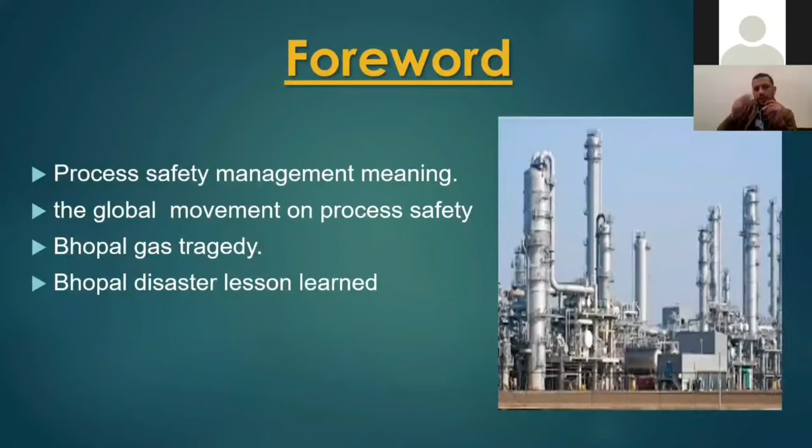But what are the lessons learned from this lecture? Firstly, to easily understand the meaning of process safety and differentiate between process safety and occupational safety. Also, you will learn about the most important accidents, how to analyze them, and the importance of learning for government, companies, and individuals from the incident lessons learned.

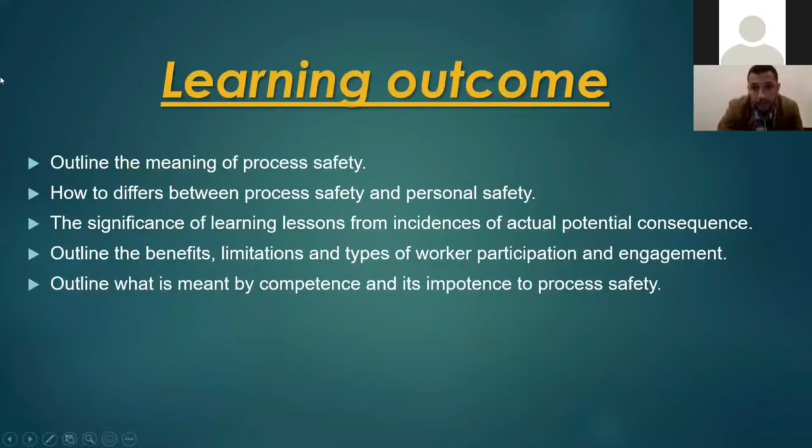Now we need to know the meaning of process safety. First, we will distinguish between process safety and personal safety. Let's start with personal safety, which has the same meaning as occupational safety.

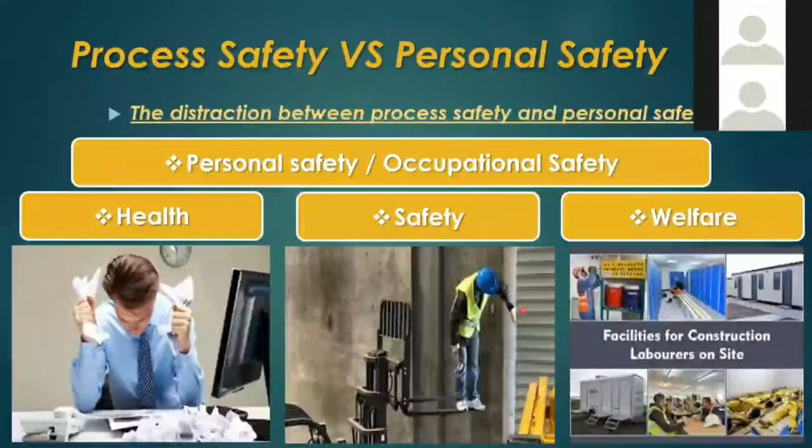The risk means the combination between the probability of a hazard and the severity of that hazard. You see here the probability and the severity. So from this figure, you can get that the risk score equals probability multiplied by severity. This is one of the methods of risk assessment, called quantitative risk assessment.

For understanding the meaning of risk, I will take the example of the working at height hazard. If you're working at height, the potential probability of falling will increase if there is no precaution set to prevent or reduce its probability, and the consequence will increase if the height increases.

Finally, again, the risk equals probability multiplied by severity.

Again, back to the meaning of important rules in industry - of course, there are some codes taking a legal phase and providing good practice for implementing occupational safety.

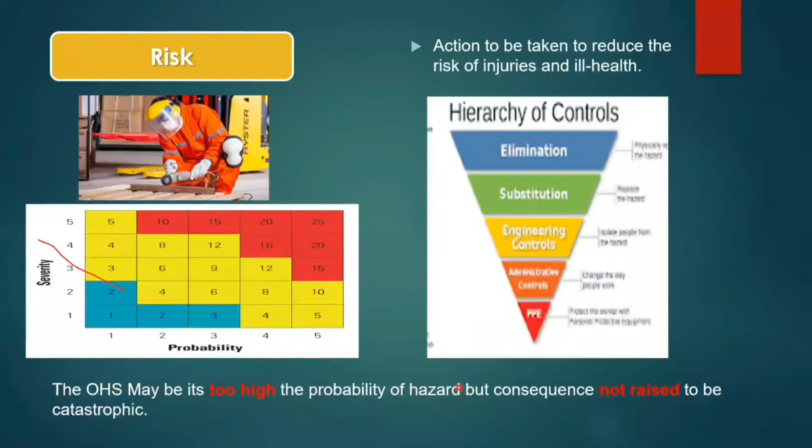Back again to occupational safety. We found that all examples and hazards of it, the probability of hazard may be too high, but the consequence does not raise to be catastrophic, which means it gives concern to safety and health more than environment. We will show in the page later.

After I describe the meaning of occupational safety, now we need to know the meaning of process safety. There are many definitions of process safety, and I will say one of them, which is referred to the NEBOSH process safety standard. It is a blend of engineering and management skills focused on preventing catastrophic accidents, near misses, structure collapse, explosion, fire, and toxic release associated with loss of containment of energy.

Also, it's focused on the hazards involved with industrial process and preventing catastrophic accidents from either, such as unintentional release of hazardous material. Finally, all of the activity related to process safety may have too low probability of hazard, but the consequence may raise to be catastrophic.

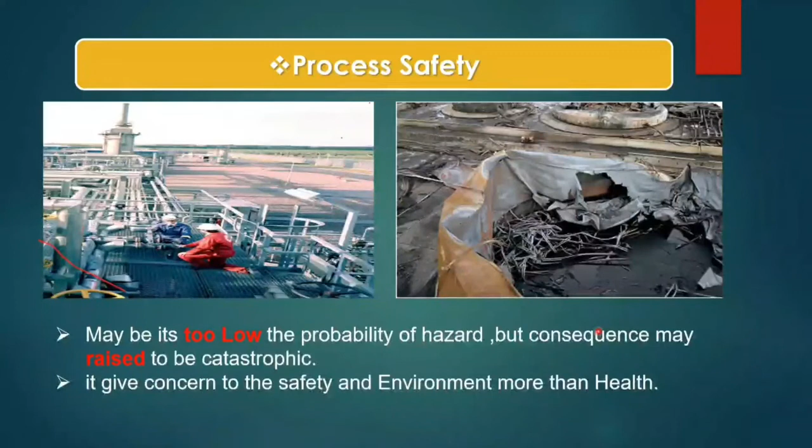So the second question is: what is the difference between personal and process safety? Okay.

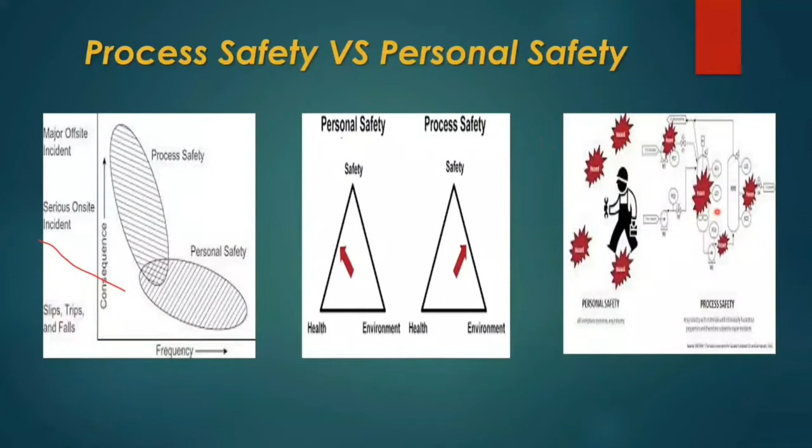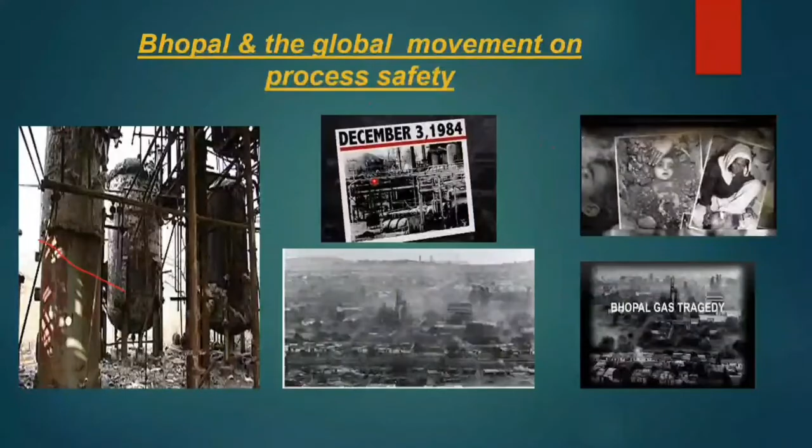Now it is important to know the Bhopal gas tragedy to help us make analysis and identify the risks, and what is the best practice and precaution taken as a lesson learned for individuals and organizations again. Please keep listening well with me and pay attention to the screen.

On 2 December 1984, the operator began routine maintenance. As you see in this figure, here is the tank of methyl isocyanate, E610. This is a jumper that had been erected. Here, the operator began routine maintenance activity in the factory owned by Union Carbide India Limited. Washing of pipes was performed to keep a filter system clean by flushing containment out with water.

Then the water reached a tank of highly reactive pesticide. The water reached the tank - I mean it's backflow as much as possible, but the most accepted theory is that the overflow device downstream from the filter was blocked. The filter was blocked, so it caused backflow to the tank, okay.

The water flowed back to the vent system through a leaking isolation valve. Water traveled hundreds of meters of pipe from the filter, eventually reaching storage tank E610, which contained 42 tons of methyl isocyanate.

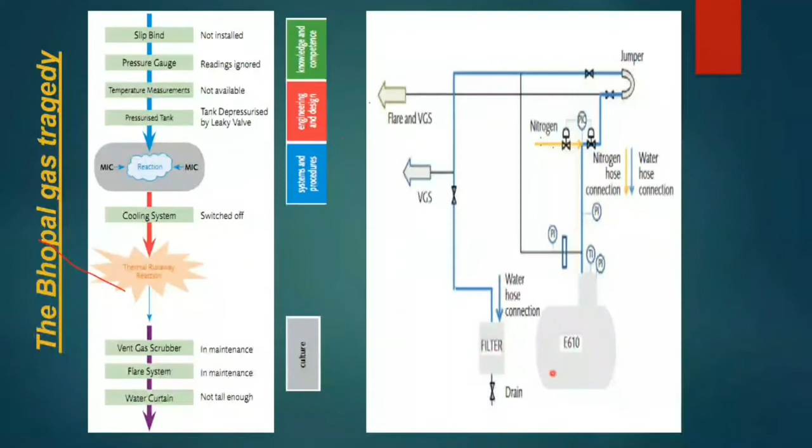Is it clear now? But why do we study this accident? To gain a learning outcome.

Several lessons learned are presented below, starting with assets integrity and reliability, process hazard analysis, inherent safer design, pre-startup safety review, employee participation, leading and lagging indicators, and emergency response plan.

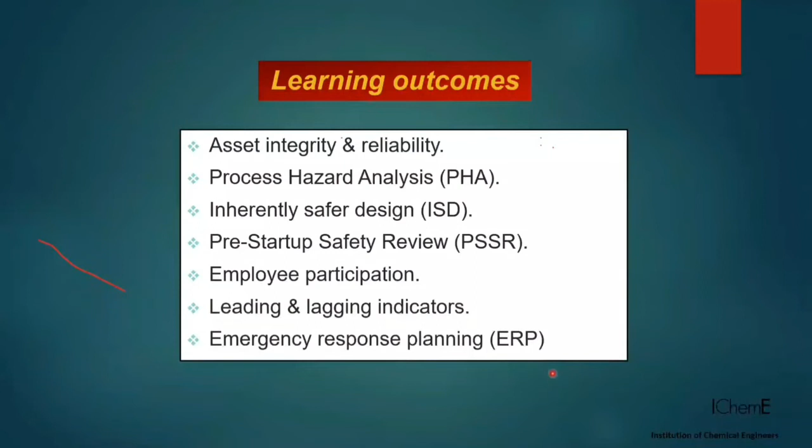Firstly, assets integrity and reliability, which shows many failures in equipment and instrument devices, which we can summarize as follows.

The refrigeration system was turned off, making it difficult to control the heat resulting from the exothermic reaction caused when water reacted with MIC, resulting in a runaway reaction. Remember, MIC is methyl isocyanate. The water reacts with MIC causing an exothermic reaction, leading to thermal runaway, and since the refrigeration system was not working, it could not control this heat.

The tank's high temperature alarm was not functioning, and there was no heat detection. Also, the vent gas scrubber (VGS), which could have detoxified the leaking gas, was under maintenance and turned off.

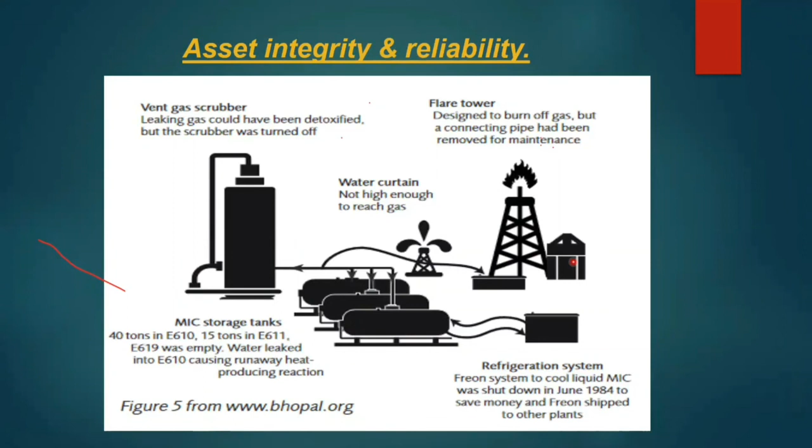Secondly, the investigation recommended and gave importance to the following: inherent safer design for avoiding hazards at the source instead of controlling them.

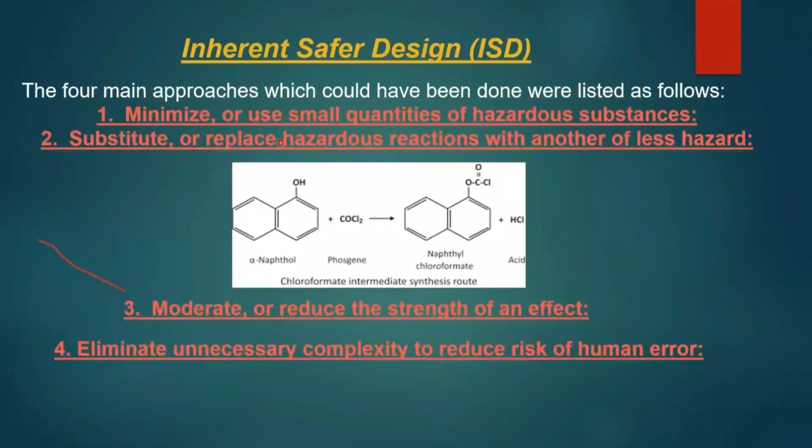By applying inherent safer design, it provides four approaches. One, minimize or use a small quantity of hazardous substance — regarding this approach, intermediate inventory can be used as it's not essential as a raw material nor a product. The second approach is to substitute or replace a hazardous reaction with one of less hazard, applied by using a safer route reacting alpha naphthol and phosgene.